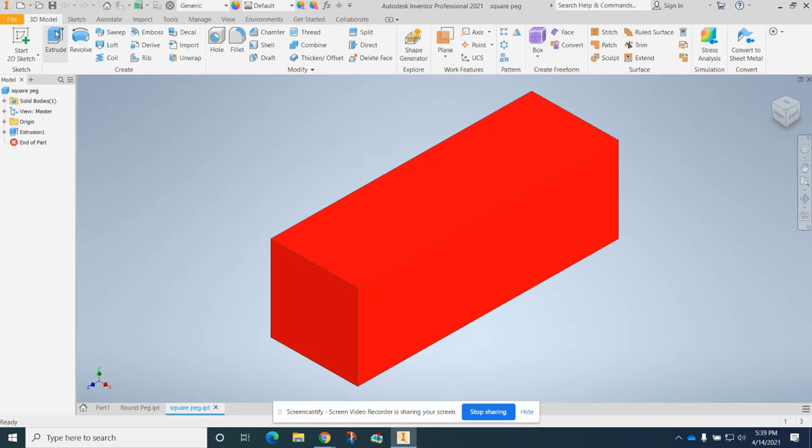Okay, now we're going to create the pegboard. So we're going to go to File, New, Standard, and start a 2D sketch on the XY plane.

This time, if you use a polygon, it gives you a center that you can measure from. You can't do that with a rectangle because it's not regular. So I'm just going to draw out a rectangle.

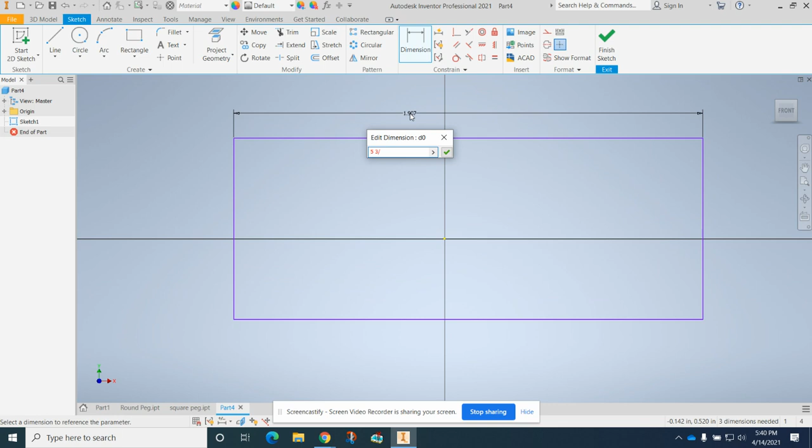I'm going to dimension this rectangle. It's going to be 5 3/4. If you want to put a mixed number, you can just put 5, hit space bar, and put 3/4, enter. It blew off my screen, so where'd it go? Simply select the front, and it brings it back into view.

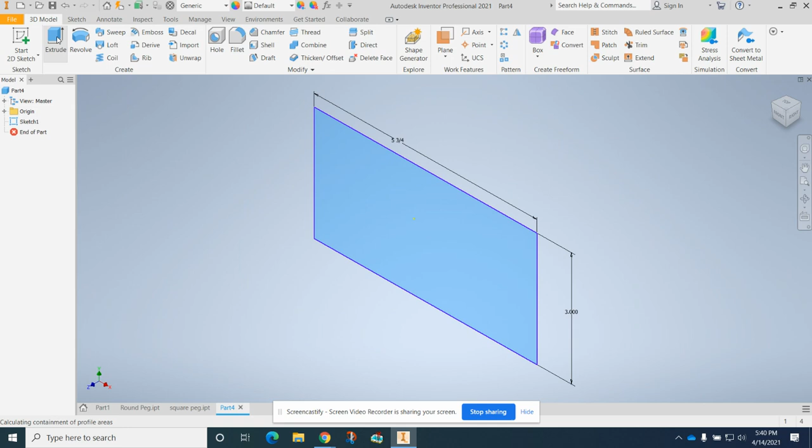We also need to dimension the right side. We're going to dimension it 3 inches. Finish your sketch. Let's click on the house and bring it back into view. Extrude, and we're going to extrude this 3/4 of an inch. You can type in decimal 75 or 3/4. Now you have the main pegboard.

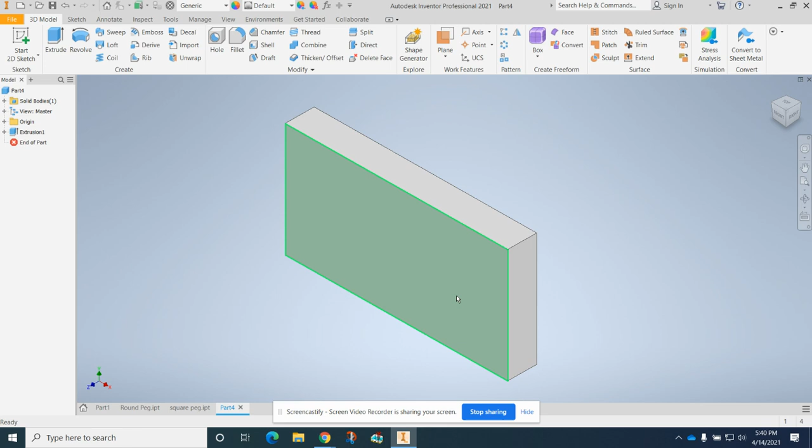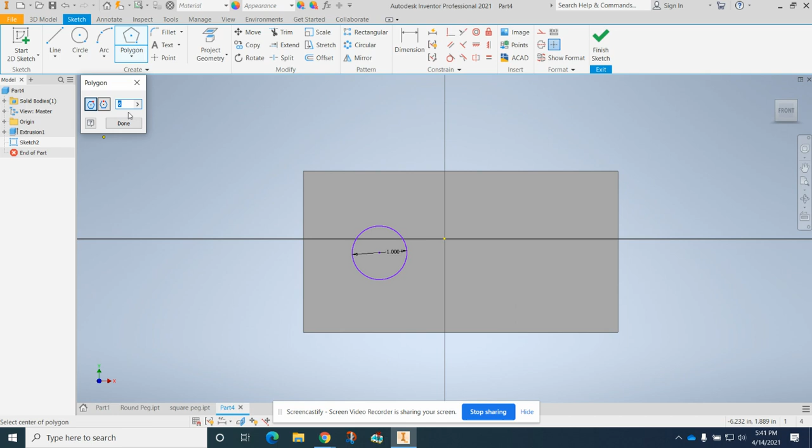Okay, now we need to put a round hole and a square hole in it. So we're going to go to Start 2D Sketch, click on the surface, and again I'm going to click on the circle. I'm going to make a 1-inch circle to take our 1-inch peg. I'm also going to click on the polygon tool. Again, you can use the rectangle tool, but this gives you a center.

When I draw a square out, I'm going to make it crooked on purpose. Hit done. You can hit this horizontal button, click on the side, and it'll straighten it up for you. We need to dimension this to be 1 inch.

We want these holes to be equal distance. So this is 5 3/4. So you got 1/3 of the way here, 1/3 of the way here, 1/3 of the way here. We want this to be 1/3 of the way from left to right. So we're going to click on dimension.

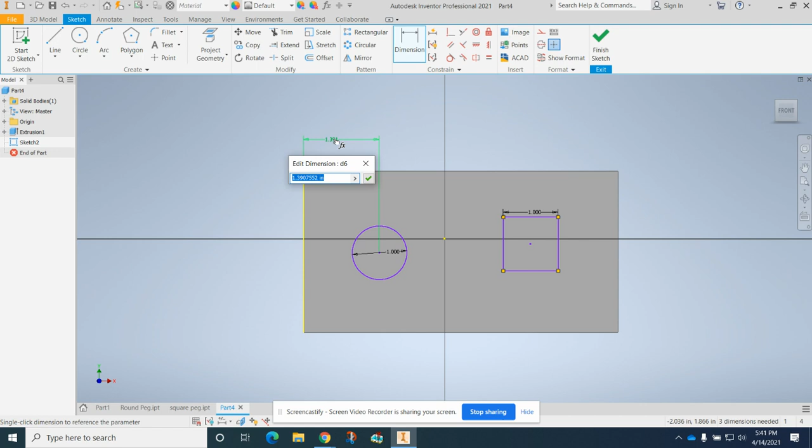We're going to click on the center of the circle, outside of the line. You can do 5 space. Let's just put 5.75. Let's divide that by 3. That'd be 1/3 of the way.

We want from the center to the top to be halfway. Remember, it was 3 inches on the side, so we're going to say 3 divided by 2, and that centers it up. We're going to do the same thing with a square.

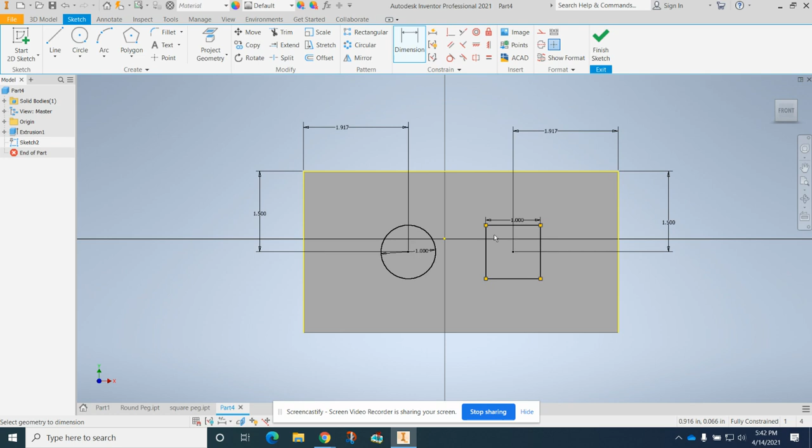3 divided by 2. And we're also going to dimension from the center of the square to the outside, 5.75 divided by 3. It should be the same distance from the outside to the center, from center to center, and from the center of the circle to the outside.

We're going to finish our sketch. We're going to go to Extrude, and we're going to go to Cut all the way through. Select inside the circle, inside the square, and it will cut all the way through.

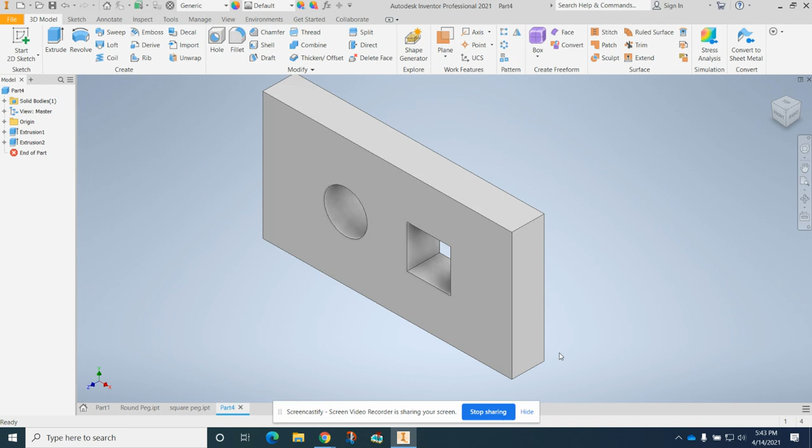Okay, all we need to do now is color it. By the way, when you drag from left to right, you know it's red—everything inside the box has to be selected to be red. But when you drag from right to left, you just have to touch it and it selects it all.

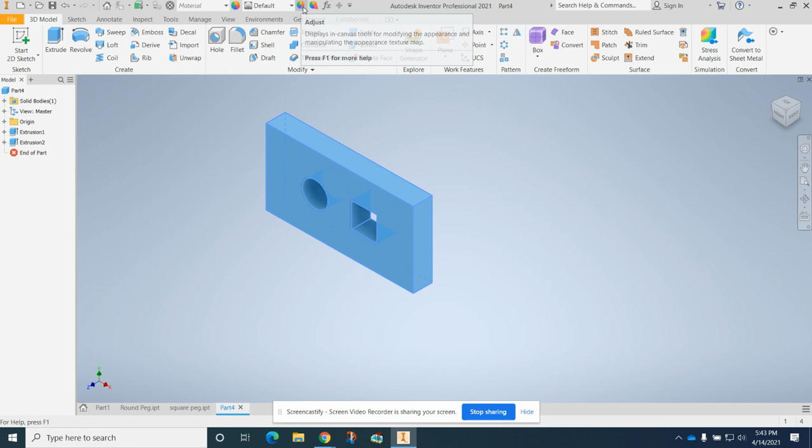Okay, let's color it. Let's pick a color. Let's make it, how about yellow?

And we're going to go to File, Save As. This time, make sure we're in the pegboard toy. And this was the actual pegboard. So, save. And next we'll add the end pieces to it.